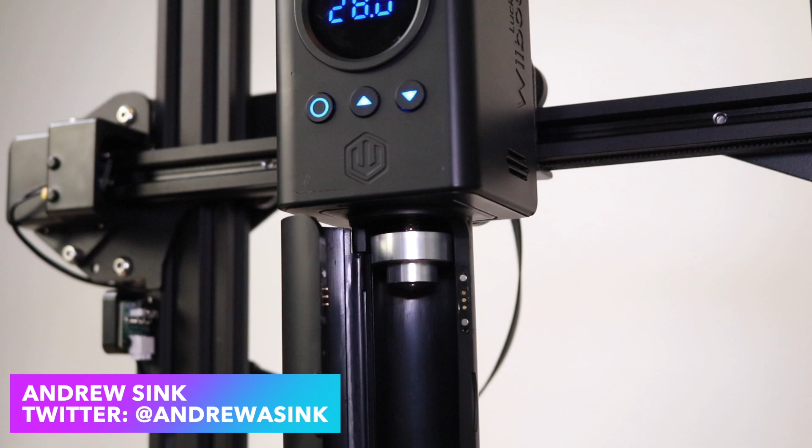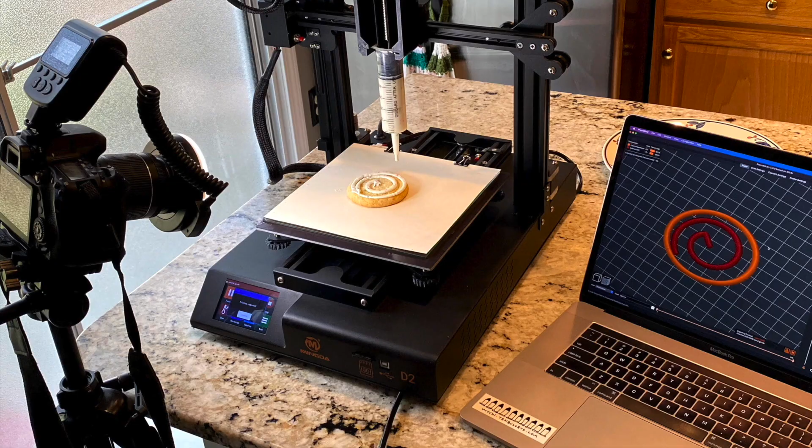This is the Wiiboox Luckybot. It's a food extruder that's designed to be a drop-in replacement on Creality Ender 3 style printers. It hasn't been launched yet, and Wiiboox is working on a Kickstarter campaign for it, and they sent me one of these extruders to review. I've had a little bit of experience with paste extruders in the past, having built one, and so I was excited to give it a try.

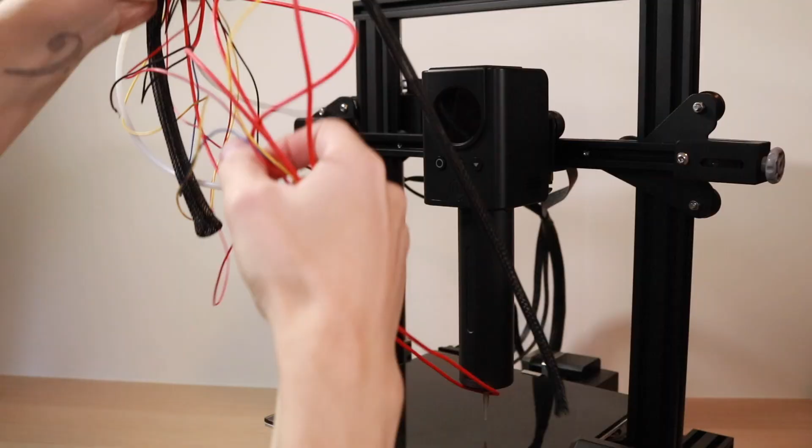The video you're seeing here is one of the only successful prints I was able to get off of this extruder. Just getting the Luckybot to this point was an absolute ordeal, and in this video we're going to talk about some of the factors that make drop-in hardware replacements like this, especially Kickstarter campaigns, so difficult for manufacturers to do correctly. This video has a little bit of everything: hardware issues, software issues, firmware issues. There's even a fire hazard involved too.

So if you just want to see the Luckybot printing, go ahead and skip to the printing section of this video. Otherwise, stick around and we're going to go through the entire process of getting this thing installed, starting with the hardware, then we're going to talk about the software, and then we're going to talk about the actual extruder itself. This isn't really a review video, so if you're thinking about buying one of these, the only reason you should watch this video is because it's a little bit of a cautionary tale. So let's start by unboxing the Luckybot.

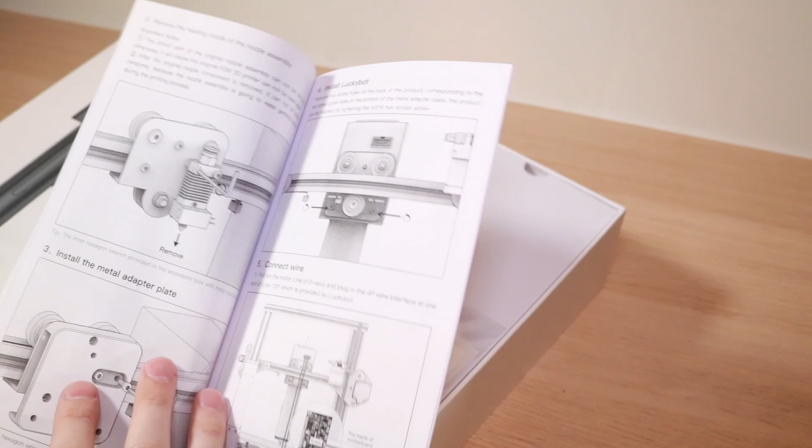I had high expectations for the Luckybot as soon as I saw the package. It's well designed, there's an instruction manual and foam cutouts for all the parts, and it just looked really professional. The user manual looks okay at first glance. It shows some disassembly instructions, and we're going to talk about those in a little bit. But at first glance, it looked pretty good. I didn't really see any giant red flags, nothing really jumped out at me.

The accessory box includes a couple of cables as well as a mounting bracket that you use to install the Luckybot onto your printer. One of the cables is a Z-axis end stop extension, and the other one is for plugging the extruder into the printer. The syringe that it comes with looks like a medical syringe. It looks like somebody cut the back off of it, and my first thought was, man, this is going to be hard to replace. Looking at the actual extruder itself, it's really well built. It looks super sharp, it's got stickers on it, it looks like a well-engineered piece of equipment. And again, I had really high hopes when I got to this stage.

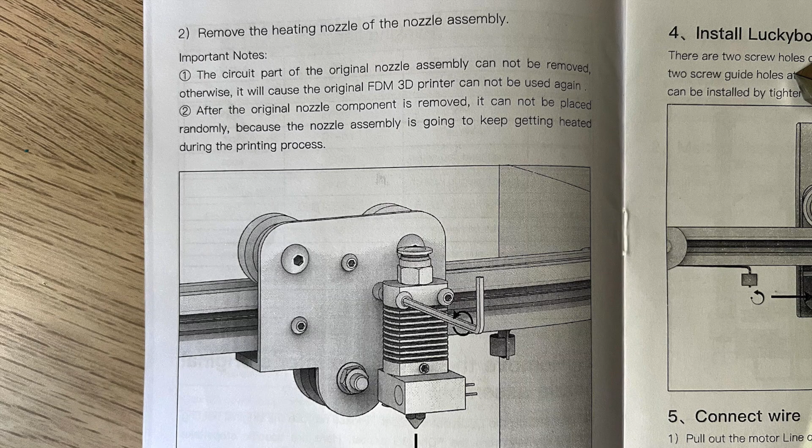The first thing I noticed during the setup process is the instructions actually call for you not to remove the circuit part of the original nozzle. So I think what they're talking about is the wiring, and this is a shockingly short-sighted approach to removing an extruder. This means that you have a hot nozzle, hot enough to ignite paper, sitting right next to the printer for the duration of the print. This isn't just a bad idea, it's a straight up fire hazard, and it even says in the instructions, watch out, it's going to heat up during printing. So I don't know what the engineers at Wiiboox are thinking, but this is totally not okay for an add-on product for a 3D printer.

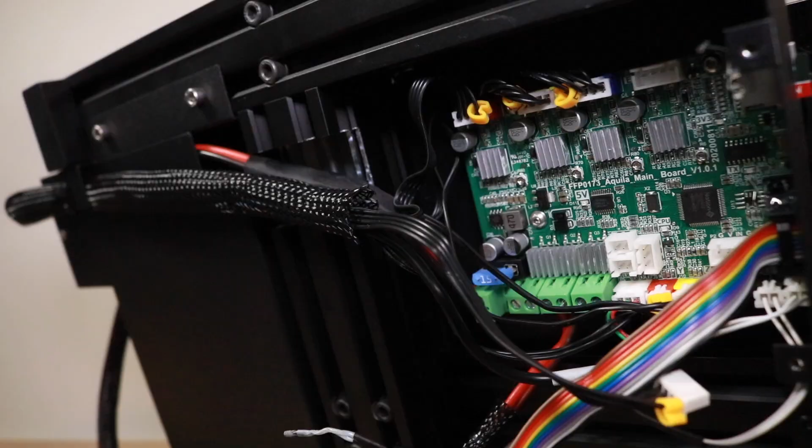Despite this huge red flag right from the get-go, I still wanted to try out the Luckybot on my printer, so I removed the entire hot end assembly. This includes the heater cartridge, the thermistor, all the wiring, and the heat shrink tubing. This is definitely the safest way to move forward, but it is going to take me hours and hours of work to get to the next stage in this process.

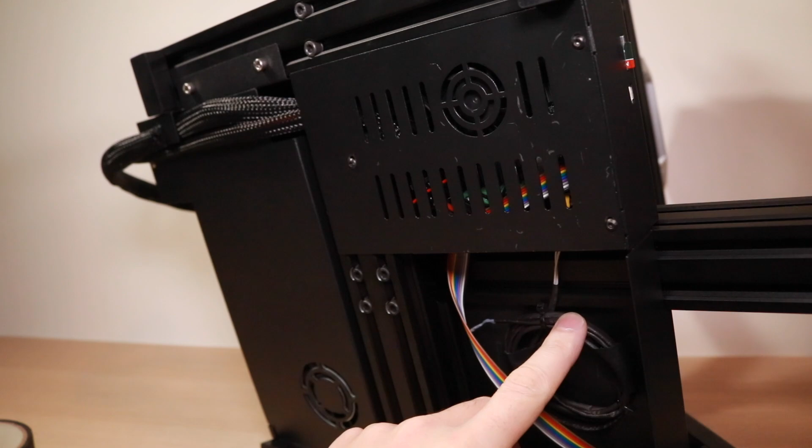You can see down here I've already undone the wires for the heater block, and I have left the thermistor plugged in. We'll take a look at that in a second. The extruder for the printer I've unplugged, and the thermistor itself I've actually coiled up and put under the printer. This way the printer is constantly showing that it's room temperature. If you unplug that, it'll throw a temperature flag error and the printer won't really react reliably. So here we have a consistent temperature being measured.

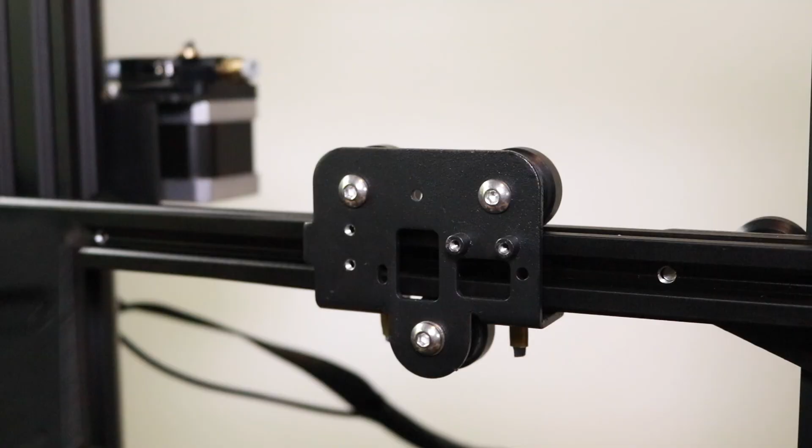So let's talk about the Luckybot cartridge itself. You'll notice it's got 3 brass inserts. So when you first see it, you think, okay, great, it's gonna have 3 points of contact. But when you actually mount the bracket, you'll see that there's 2 points that mount it to the gantry on the 3D printer, but the third hole doesn't actually line up. You can see if I tilt it to the side, I can see straight through it, but it's actually just a little bit off, which is a pretty huge QC issue.

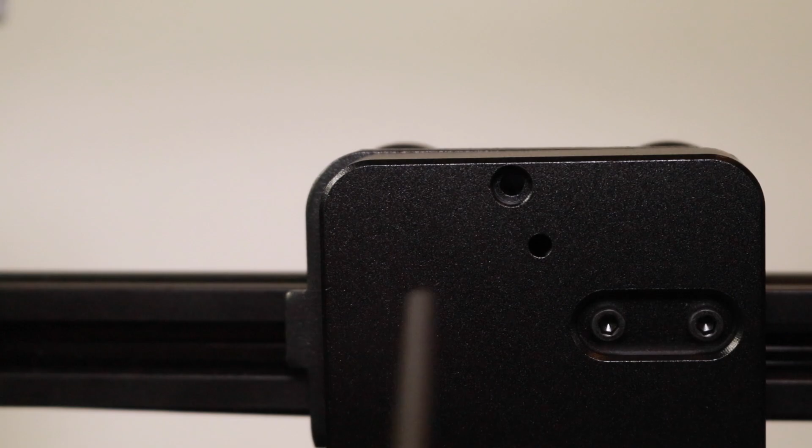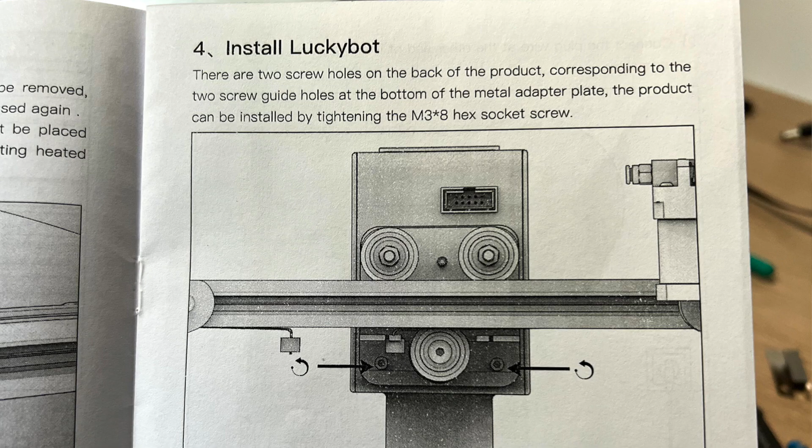And you can see on the bottom, the 2 bolts screw right in, no problem, but the one on top doesn't mount, and in the instructions, it actually only shows the bottom 2 being installed, which indicates Wiiboox knew that this was an issue. So if you're wondering why this is a big deal, well, this is a big, heavy accessory, and it's not really locked into place, so it's not constrained, it can still sort of wobble back and forth.

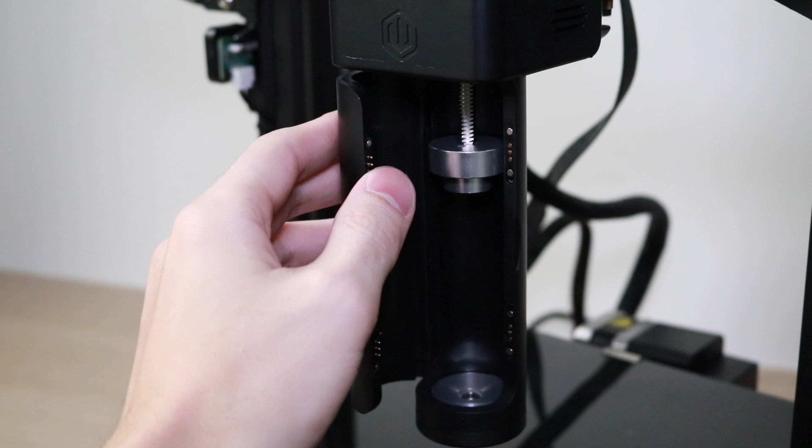The door of the extruder is held in place with 4 little magnets and pogo pins. I hate pogo pins. I have no real rational reason for disliking them, but they're so delicate, and when you have them on an accessory that's going to vibrate back and forth, especially something that's going to be opened, there's a legitimate concern they're not going to keep good contact.

Okay, so just to recap, we've removed the bracket with both cooling fans attached to it, the hot end, the nozzle, the heater block, the heat shrink tubing, and all of the associated wiring. So this is everything that we've pulled off, and we've replaced it with the Luckybot extruder.

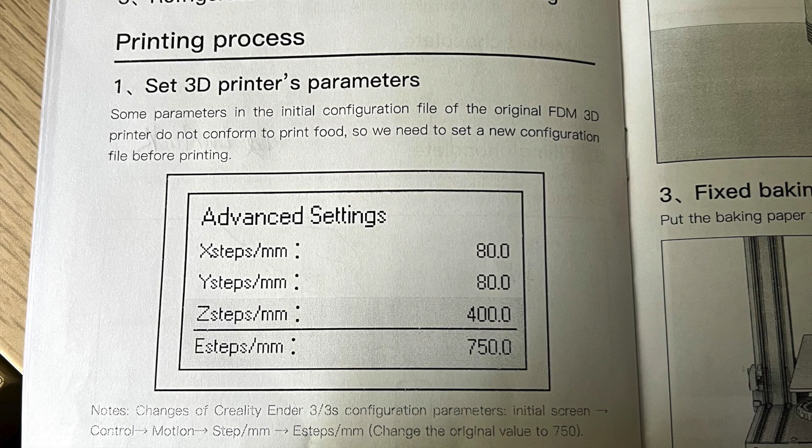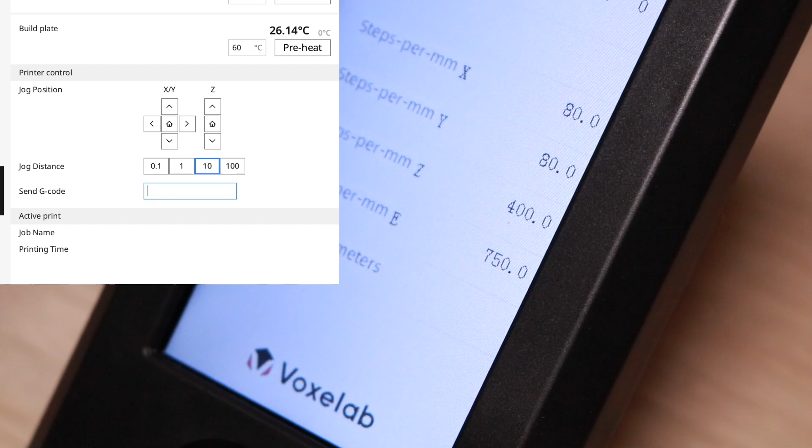Next, we have to set the steps per millimeter for the new extruder. The instructions call for 750 steps per millimeter, but when I went to go update it on the printer, it was firmware locked at 186. Not the end of the world, I just fired up a terminal in Cura and actually sent the command to update it to 750 manually, and that actually worked. Once that was sent, I could go into the menu and see that it was persistent. So even after restarting the printer, it would stay at 750.

So now that the hardware is all installed, we should be able to start printing, right? Nope, not even close, not by a long shot. The next part of this process took me almost as long as setting up the hardware. This was probably about 10 hours combined between solving hardware and software bugs. Right off the bat, the printer recognizes that the heater block is missing, and it'll prevent any signal from being sent to the extruder while the nozzle's technically cold. So in order to fix this, we actually have to go into Marlin and update the firmware to get rid of the prevent cold extrusion line.

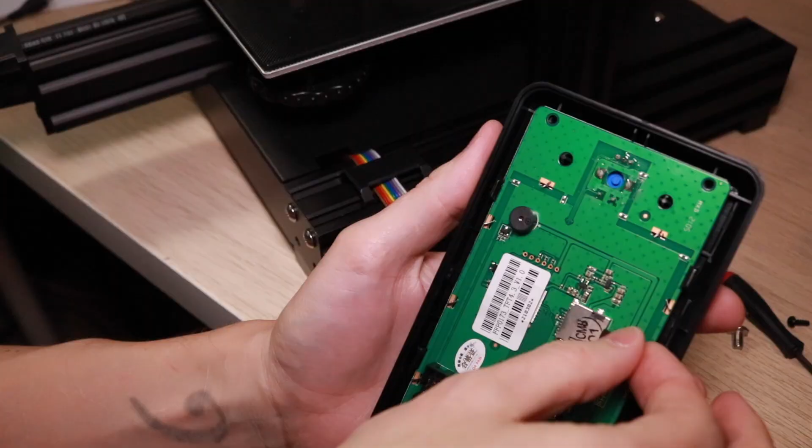This was a massive pain, and I think it's way past what's reasonable to expect somebody who's bought this extruder to go through. I think most people who are buying the Luckybot expect to just slap it on and start printing, not spend an hour and a half mucking around in Visual Studio trying to get an updated firmware. On top of everything else, flashing the firmware is a complicated process. It involves disassembling the printer and doing things that might be difficult to undo later.

So one of the only consolation prizes that I got out of this entire experience was after reflashing the firmware, I discovered it's actually possible to change the boot screen on your printer. So that was kind of cool. And now I have this.

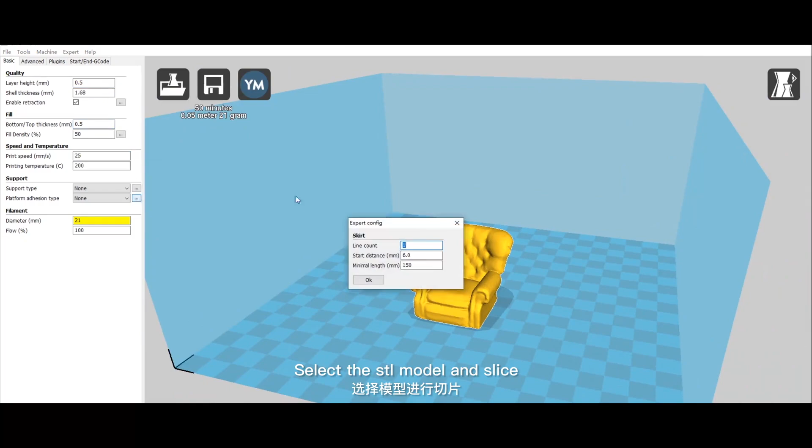So now the hardware and the software are set up, so we should be good to go, right? Nope, guess again. The hardest part is actually still ahead of us. We have to build a profile in a slicer app for printing chocolate. I reached out to Wiiboox and asked them if they had a profile I could use, and they sent me this video. You ready? Did you catch all that? Here, let's watch it one more time. That's not sped up or anything, that's just how fast the video is.

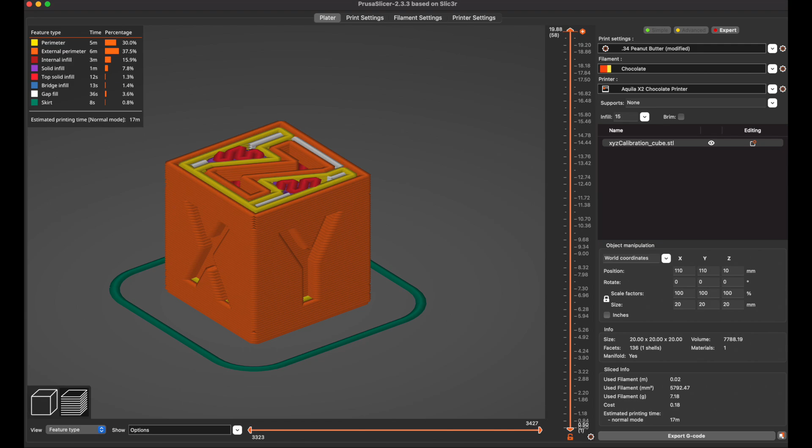On top of not really having a lot of detail, when I pressed Wiiboox for more information, they said, oh, you can just import an STL and hit print. So I knew this was going to be a struggle. I knew that creating a profile was going to be a challenge. I've built a paste extruder before, and I know that it's a difficult process. So I tried to build everything in Prusa Slicer. It's just what I'm used to, and it's what I have a little bit of experience with. The last paste extruder I built used Prusa Slicer, so I figured I'd give it a shot.

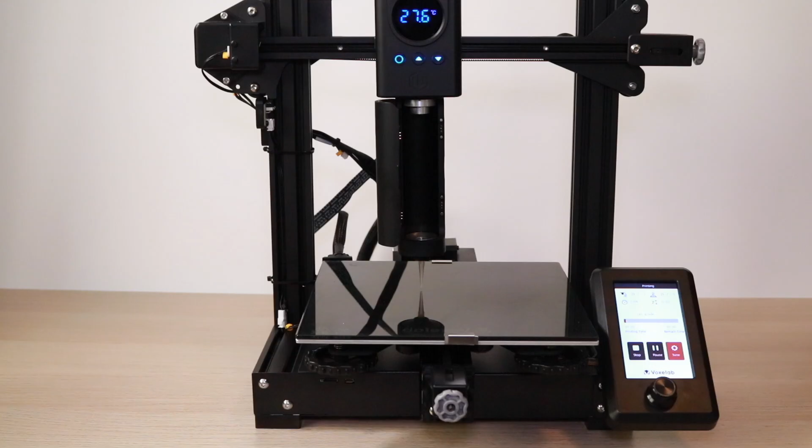If you are watching this video hoping to find a profile for your Luckybot, I don't know what to tell you. Hopefully by the time that you're watching this, Luckybot has released a universal profile for Cura or Prusa Slicer, but in the meantime, it took a lot of fiddling and I'm still not super happy with where I got. Okay, so now we have hardware, software, and slicer profile ready. Now can we try printing something? Yes, now it's time to try printing something.

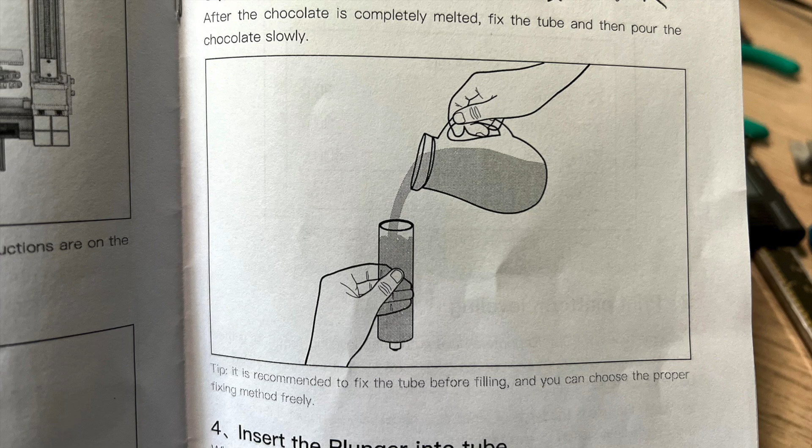First, we have to fill the cartridge, and the instructions are so simplified, they're almost offensive. It says, after the chocolate's completely melted, fix the tube, pour the chocolate slowly, and it's got a picture of chocolate being poured from a pitcher. You don't need to be a chocolatier to know this is not how chocolate works.

So I bought some easy melt chocolate. I figured that would be the best chance of success I had at actually filling this tube. So I put a couple of chunks in a microwave safe container and microwaved them for about 2.5 minutes until it was runny enough to pour. You have to be really careful when you're pouring the chocolate to try and avoid air bubbles. Air bubbles won't rise up out of the chocolate, and during extrusion, they'll come out as pops and they'll give you all these wacky, inconsistent extrusions.

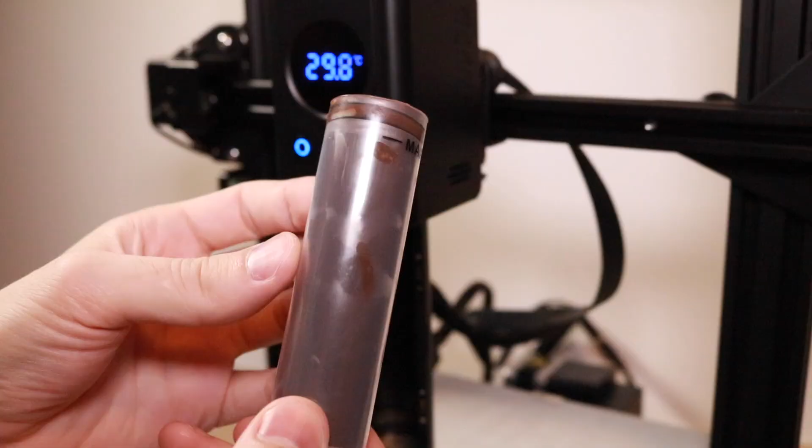Once the chocolate tube has been fully filled, we're going to put the rubber plunger in there and try and get it to sit flush. Because it's a rubber plunger, it introduces compression into the system, which is incredibly annoying, and also it doesn't really want to go flat. It always kind of rocks to one side or the other, so it's going to make a mess. There's really no way around it. Once the tube's been filled with chocolate, we want to refrigerate it so it solidifies and we can avoid getting any air bubbles in there.

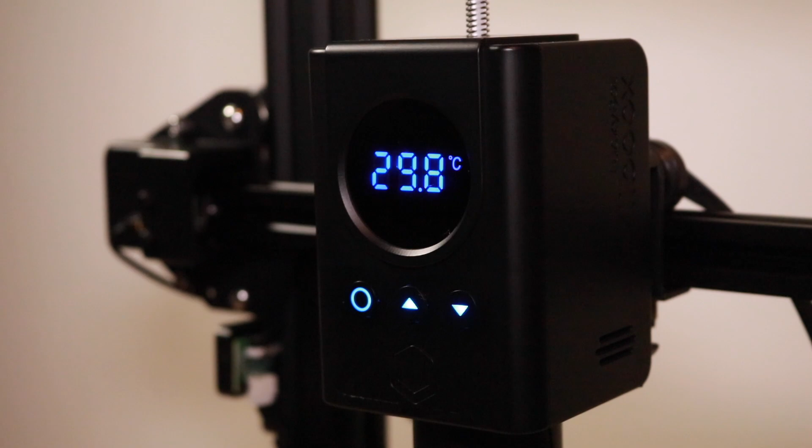Once I've pulled it out of the refrigerator, I let it come to room temperature before sticking it into the cartridge and hitting preheat. The preheat brings it up to 34 degrees Celsius, that's the target temperature, and it does this over time. We'll let it sit for about a half hour before actually hitting extrude. So after all of our hard work, it's almost time to see our first bead of chocolate extruded. So let's go ahead and try it. Huh, okay. Maybe we should just try it one more time.

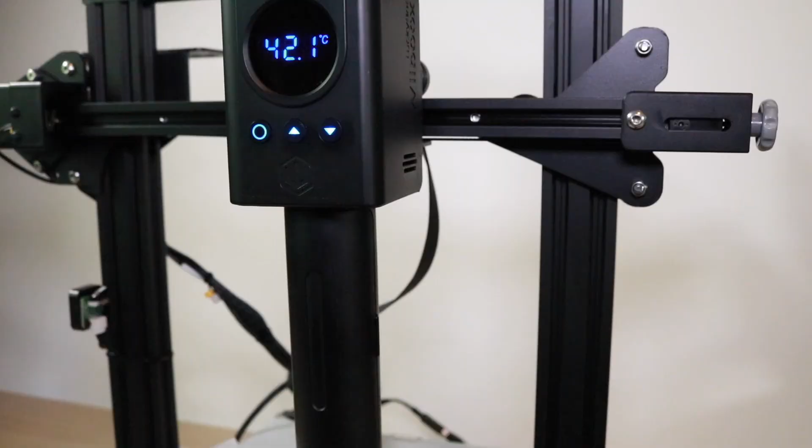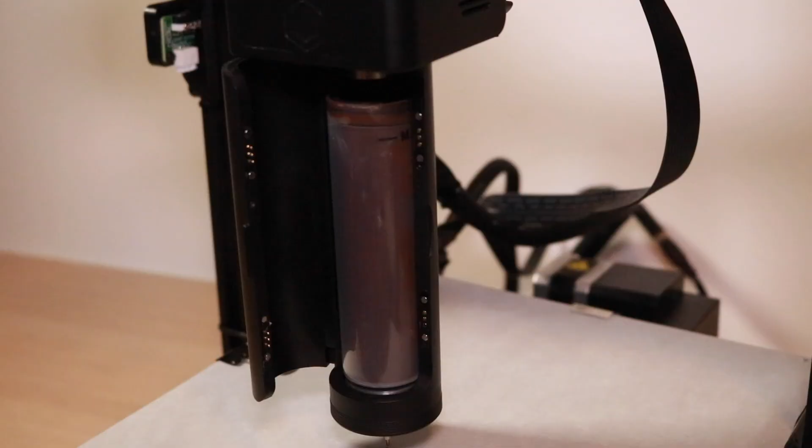So what's happening here? The chocolate has been liquefied, and if I pull the tube out and squeeze it, I can remove it manually, but for some reason I can't get it to extrude. I verified that the nozzle isn't clogged, and I've even tried bringing it up to 45 degrees C for a half hour to see if that helped. So, did it? I can see that the chocolate is melted, and pushing on the tube causes it to extrude from the nozzle, so I know that the nozzle isn't clogged either, but the motor doesn't seem to have enough torque to actually push the chocolate through. I even tried removing the majority of the chocolate from the tube to see if it would make a difference, and it didn't.

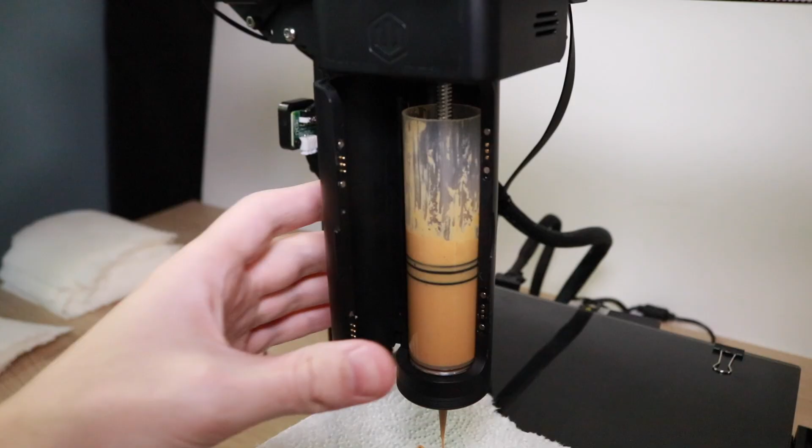On top of everything else, I disassembled the lead screw mechanism to see if there's any blockage, and I found the top of the lead screw was covered in metal shavings. Metal shavings right near the chocolate. I thought a lower viscosity material like peanut butter might work, but still nothing. Holding down the extrude button would cause some material to come out, but you can see it rapidly start to under extrude. This can be fixed by holding down the extrude button again, but still, it's only a temporary fix. Eventually, the amount of force required to push the material, it's just too much for the motor.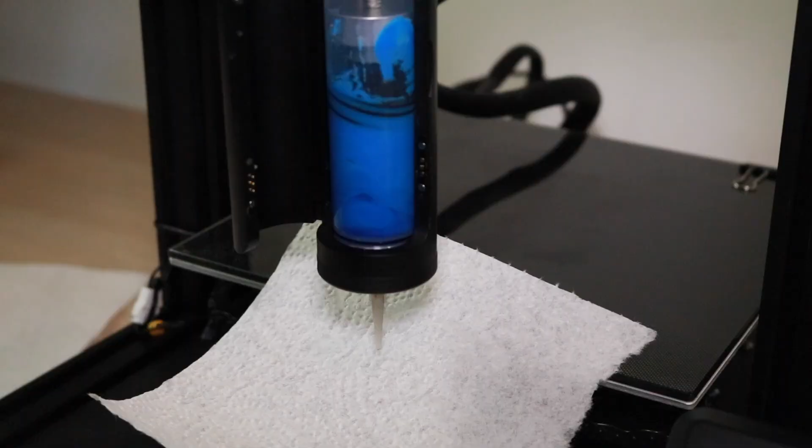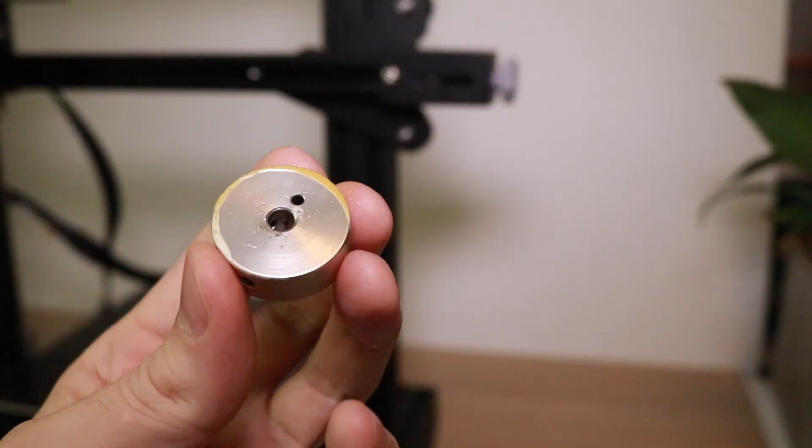I tried the lowest viscosity material I could think of that would still hold its form and not just fall out of the tube, and that was cake icing. And this actually worked. This was the closest thing to a successful print that I got, was with cake icing. I'm not going to say don't buy the Luckybot, but I can definitely say you should not buy the Luckybot if you think that it's going to be a plug-and-play operation. This was a massive time sink, and I spent way more time than I should have, and if you can't tell, I might be a little bit salty about that.

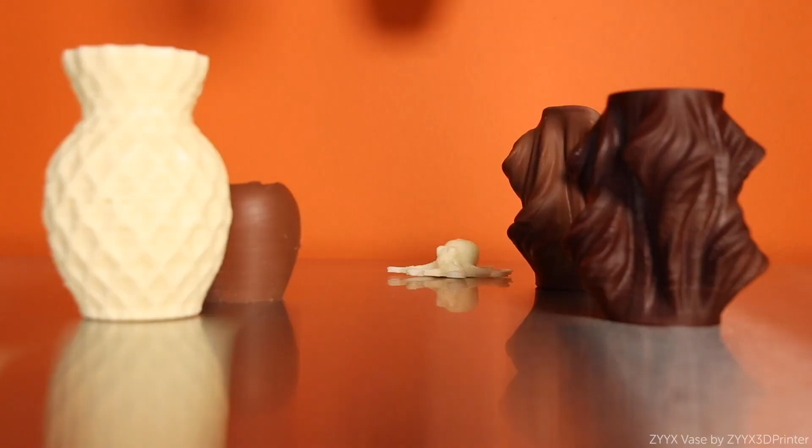If you're interested in 3D printing chocolate, I would highly recommend taking a minute to read about the Cocoa Press by Evan Weinstein. Evan has put a tremendous amount of time and effort into making a 3D printer capable of printing chocolate, and he actually helped me quite a bit while making this video.

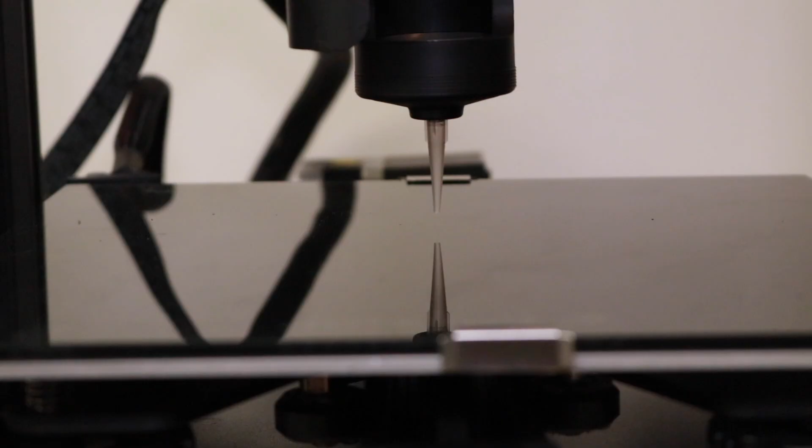My experience with the Luckybot was a disappointing one, and I think Wiiboox really has their work cut out for them if they're going to make this product successful. On top of not being totally functional, it's actually outright dangerous to have the Luckybot set up as it stands right now. The Luckybot is not a plug-and-play solution. Don't get me wrong, it's a gorgeous piece of hardware. The injection molded enclosure looks great, it has a bright backlit screen and backlit buttons, and it looks really nice, but it's just not functional to the level I would expect. All that being said, I think there is a market for a plug-and-play food extruder, I just don't know if this is the one.